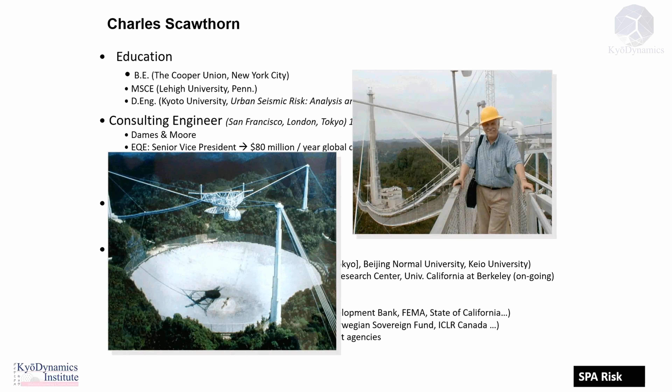I think you may be familiar with this. It was, no longer is, unfortunately, the Arecibo Radio Observatory in Puerto Rico. And about 20 years ago, I did a structural dynamic analysis of this for earthquake loading. It was very gratifying for me to do that, by the way, because my undergraduate professor had designed the structure back in the 1960s. It's a shame what happened to it. These are some of my books and publications, but that's the introduction.

My firm, SPA Risk, SPA stands for Scawthorn Porter Associates, and it's simply myself and Professor Keith Porter. He is a professor at the University of Colorado at Boulder, and we have one foot in academia and one foot in practice, and we both enjoy doing that. If you want to know more about the company, there's the URL for the website.

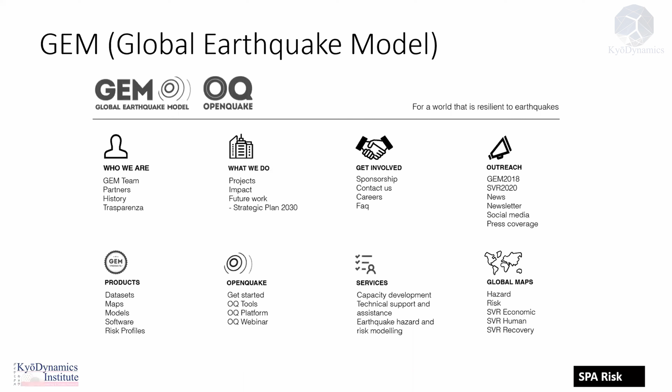I think most of you may be familiar with the global earthquake model, and I will not spend a long time discussing it or introducing it. If you don't know about it, you can quickly learn about it by going to their website, by Googling global earthquake model. GEM, the global earthquake model, was started about 15 years ago and has made tremendous progress in modeling both hazard and risk due to earthquake around the world.

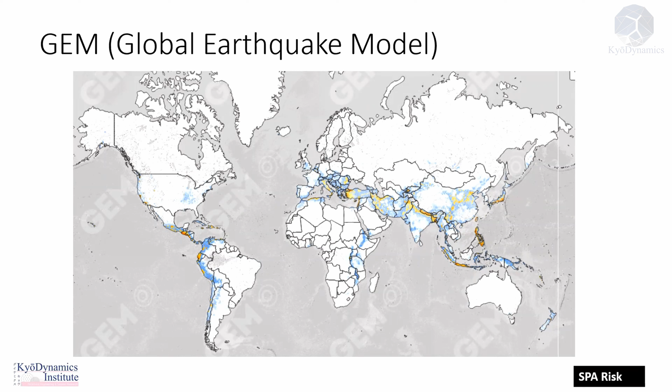This is their global map, and they are producing many of the foundational data, such as historic seismicity, instrumental seismicity, fault parameters, building inventories, building fragility functions, and so on. And the building inventories required the taxonomy, which is what I'll be speaking about today. This is a close-up of some of their mapping of the seismic hazard in Latin America.

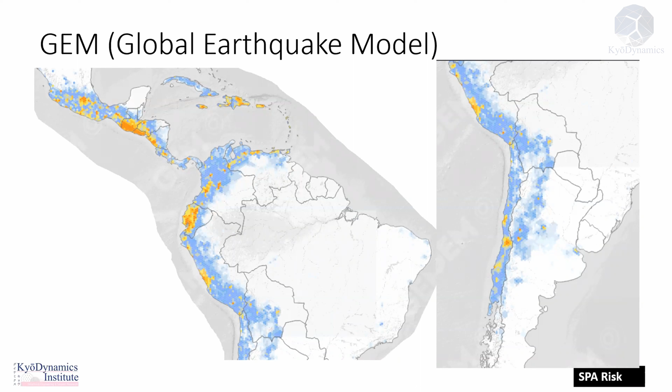So a taxonomy, what is it? The word was coined in 1813 by the Swiss botanist Candolle. It comes from the Greek, from taxis, meaning order, and nomos, meaning law. So it's a set of rules by which to create an order. It refers to the classification of things in an ordered system that reflects their relationships.

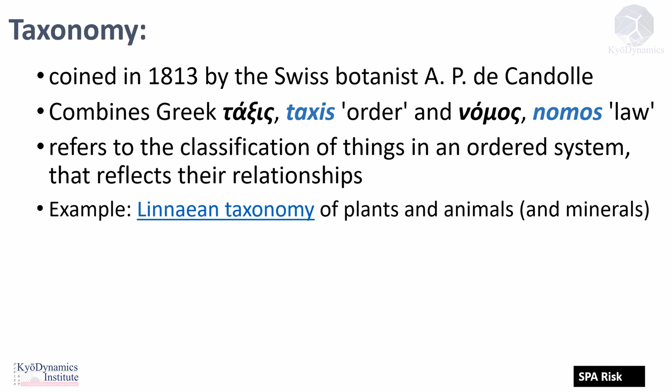The most famous and probably one of the first taxonomies was that developed by Linnaeus for plants and animals, which is still used today in the scientific world. Homo sapiens is an example of what we are called within that taxonomy. He also had a system for minerals, by the way, but that is not widely used. An example starts from the domain and goes down through the kingdom, the phylum, and so on to the genus Canis, where we have dogs and wolves.

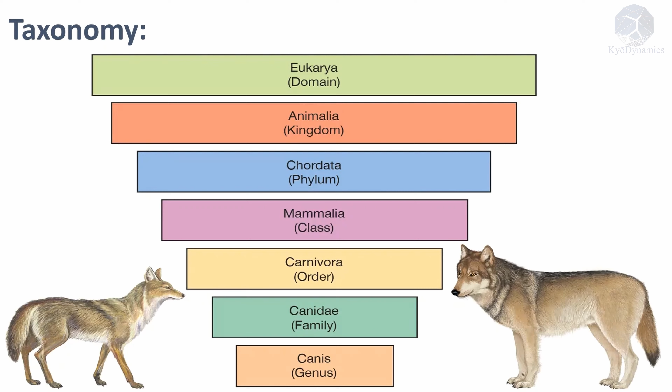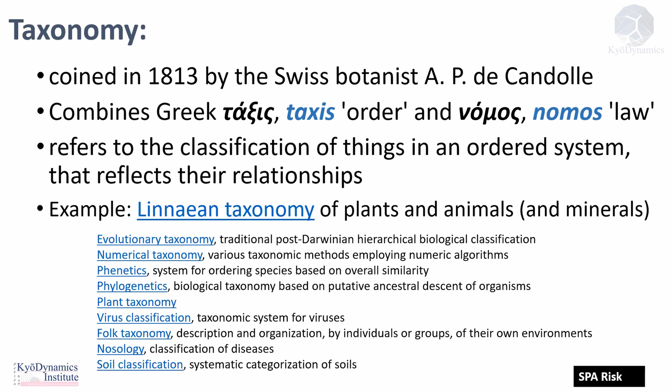Since that time of Linnaeus, there have been many other taxonomies that have been developed, and whatever field you work in, you're probably using a taxonomy or two right now. What I wish to speak about is a building taxonomy, which we define as describing the characteristics of an individual building or class of buildings with similar characteristics, a building typology.

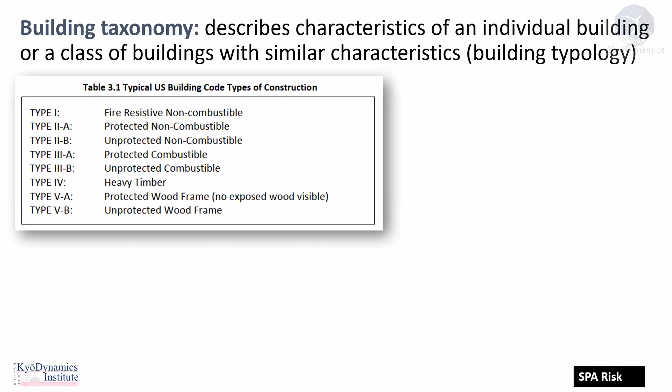There have been building taxonomies in the past. My references here will mostly be to North American practice, since that's what I'm familiar with. One of the most common is from the US, what used to be called the UBC, or Uniform Building Code, now called the International Building Code. And this is the taxonomy that they use for buildings in that code. Very simple and primarily driven by fire protection.

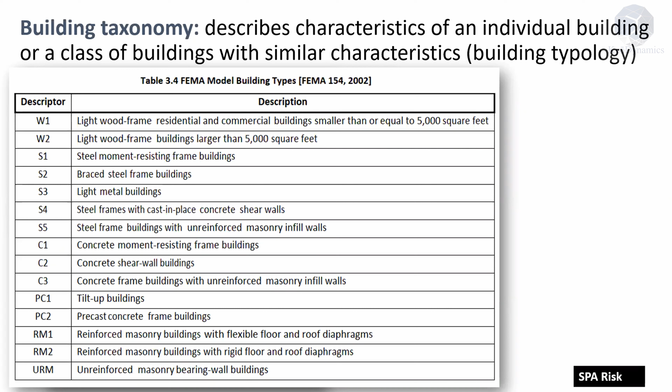For example, the last item in the list, URM, or unreinforced masonry bearing wall buildings. There are so many different kinds of unreinforced masonry bearing wall buildings that to all label them with a common label is just not accurate or useful. And so it's very unsatisfying. And that's what drove the development by GEM to develop this.

Rather, let me just say that in doing this, we reviewed all of this, and we came to the conclusion that a building taxonomy useful for risk analysis, particularly earthquake risk analysis, did not exist when we were doing this work. So the Global Earthquake Model funded this project, and the purpose was to collect information on buildings around the world to develop a basis for assessing their seismic vulnerability and associated risk.

The taxonomy, at the beginning, we set ourselves certain objectives. It should be international, cover all parts of the world, and be able to be applied in any part of the world. It should meet the needs of users who are able to collect information in sufficient detail, but also others who have access to only very limited information. So it should be at the same time deep where that's possible and, where it's not, relatively broad and shallow. On the other hand, we also set an objective that it should be manageable, and there should be a balance between the depth and the breadth of coverage.

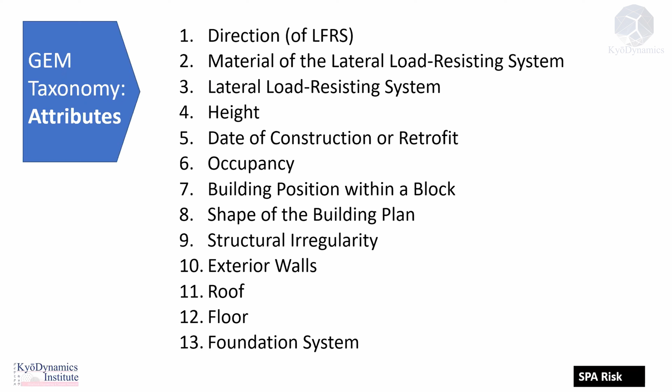A building built 100 years ago but retrofitted 10 years ago is not a 100-year-old building from an earthquake point of view. The occupancy, residential, commercial, and so on. The building position within the block, I'll talk more about that in a moment. The shape of the building plan, the structural irregularity, the exterior walls, the roof, the floor, the foundation system, and so on.

Now, I have a little video here that actually goes through this in a bit more detail. This was put together by the project, and let me just show it here. It goes on for 3 or 4 minutes. And let's see here. You may not be able to hear the audio. I'm sorry, I beg your pardon. This doesn't seem to be running here. Let's see. I'm sorry, the audio is... Alejandra, is the audio coming through? No. Okay. Well, we'll skip the video then.

The video was actually produced for lay people to very quickly lay out more or less what I just said. It was going to repeat some of what I just said and what I'll say here. These show those 13 attributes again, and for each one of them, you can see that they are the primary layer, but then beneath them, there are further attributes.

For example, if we look at the height, we define the height as the number of stories below ground, the height of the ground floor above grade, and the slope of the ground. And then, of course, the height of the roof above the ground also. The height of the ground floor above grade, by the way, may not be so relevant for earthquake concerns, but we were also looking ahead, and that would be of great interest for flood-related risk. The first version of this was focused on earthquake, but still we were trying to capture some of these things.

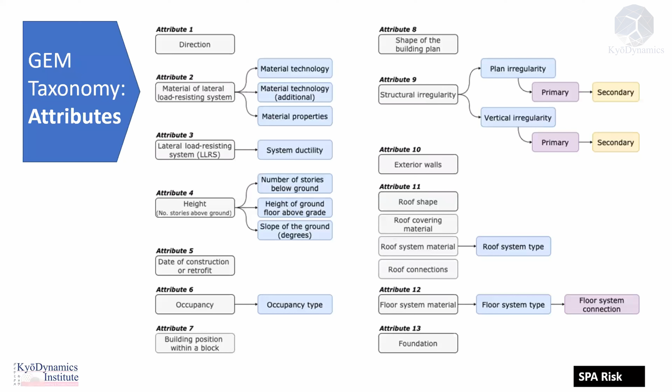So I hope you've had a chance to look at this diagram here. I'm not going to go through it in detail. And then if we just take a masonry building, as I mentioned before, masonry construction exists around the world in many different forms, depending upon the local materials and other things. So this shows you an example of the material technology just for masonry. You can see the different kinds of masonry materials we have here.

Masonry units that are unknown, or perhaps adobe block, or stone of an unknown technology, or rubble, meaning field stone or semi-dressed stone, or dressed stone, or fired clay units, but we don't know what type, or fired clay solid bricks, or fired clay hollow bricks, and so on and so forth. So all of these different kinds of masonry units can be defined within the taxonomy. We have codes for each of these.

Similarly, for the mortar, for example, was there no mortar? In various places there is masonry that's built without any mortar at all, so-called dry masonry or dry stone. Then there's mud mortar, there's lime mortar, there's cement mortar, and so on. And the different kinds of stone. Is it limestone, sandstone, granite, and so on, or unknown?

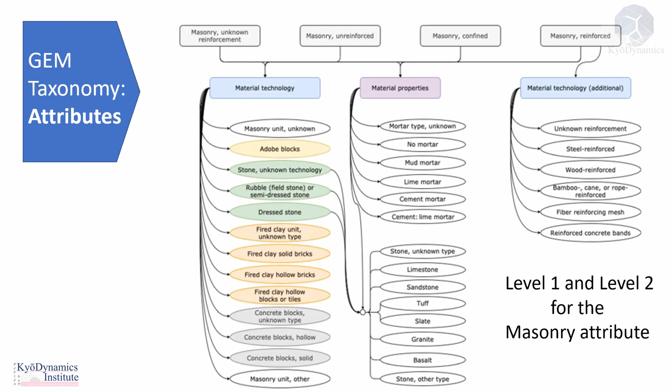All of these attributes were then compiled in a series of tables. Each table contains the values for one building attribute. This is, for example, the table for the lateral force resisting system. And you can see that at level 1, we have a lateral force resisting system, and L99 is a code meaning it's an unknown lateral force resisting system.

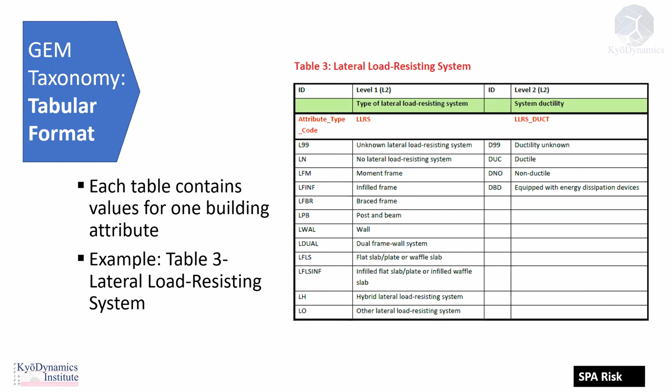LN means there's no lateral force resisting system. LFM means a moment frame. LFINF, an infill frame, then a braced frame, post and beam, and so on and so forth. And then over on the right at level 2, depending on whichever lateral force resisting system it is, there's a code for defining it as ductile, non-ductile, or equipped with energy dissipation devices. Level 1 and level 2.

And actually, by clicking on that, I'm hoping it will take us to that page. I don't see it happening. Again, sorry about that. My connections today are slow or don't exist.

But the idea, again, this is easy to find. You can just look up GEM glossary, and we define each of these terms. And similarly, putting all these terms together can become very daunting. So we developed a GEM building taxonomy tool, called TaxT, and it goes through and you enter whatever you know about it. And again, I'm going to try to go to that.

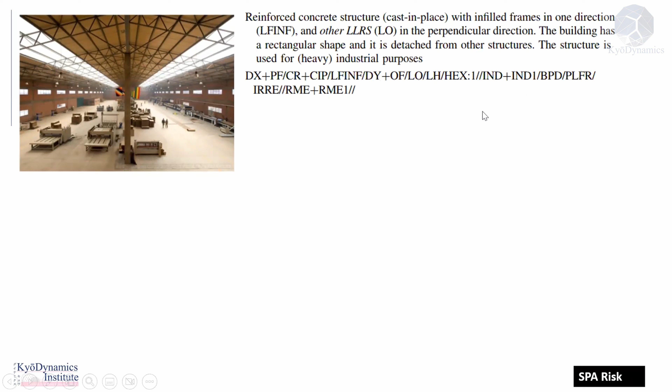So all of those aspects are covered in this code here. And I used to be able to read this code off very easily. I can't right now. Here's another one, a 14-story residential reinforced concrete building. So you would enter all the information you need, and the TaxT tool that I showed you would just generate this code. And this code is what goes into a database.

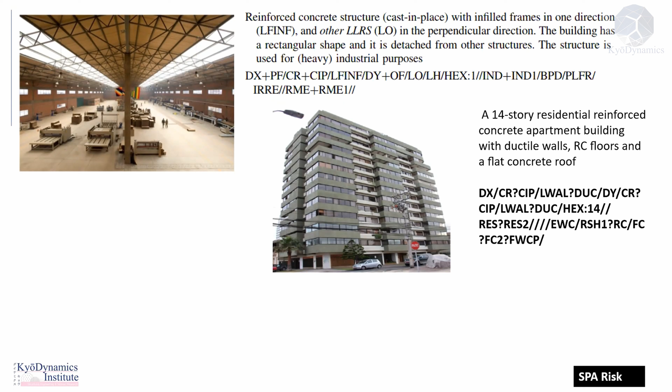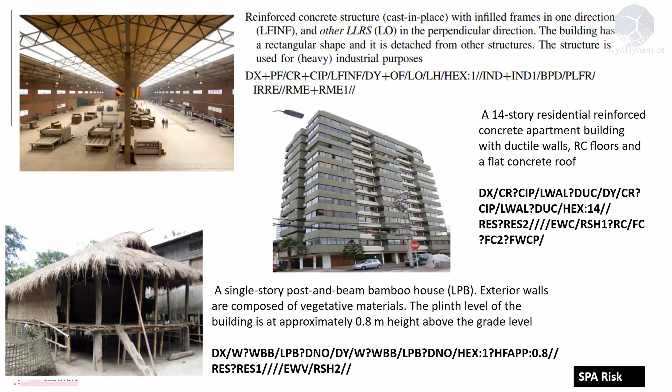Here's a third one. And this is a single-story post and beam bamboo house. As you can see, it's what's called vernacular, or relatively non-engineered construction from, I think in this case, Southeast Asia. So you can see the taxonomy was designed and is constructed so that we can go from heavy industrial buildings to more ordinary urban type buildings to rural buildings in any part of the world. And all of this is possible. The taxonomy can describe any of these kinds of buildings.

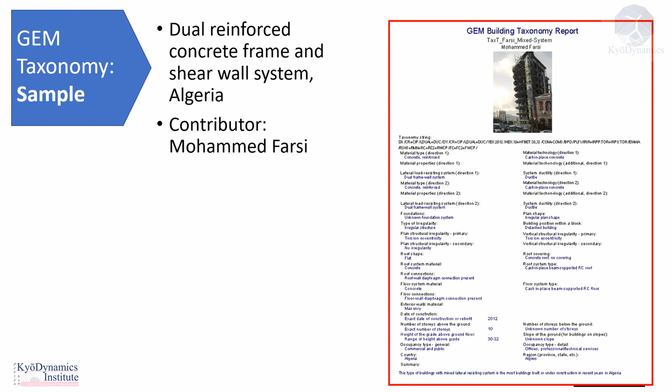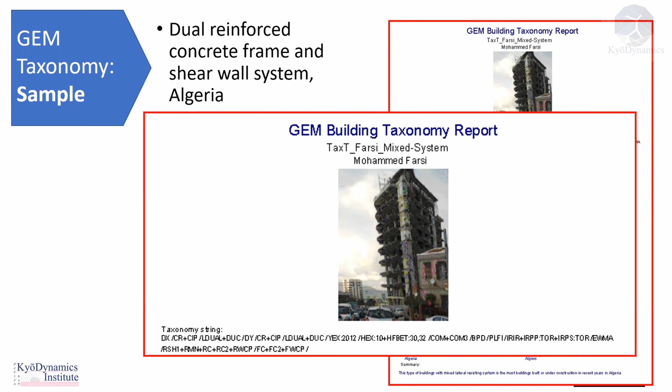Similarly, the same people give another example, again from Algeria, a high-rise building, and this was the taxonomic code for that high-rise building. So you can see that with a string of basically one line, you're able to describe a tremendous amount of information about a building that can then be used for regional earthquake damage loss estimation. And when I say regional, it can be at a very broad scale, say nationally, or it can be at a relatively small scale within one neighborhood and so on. Now, so that's a description of the, whoops, sorry.

I'm not sure what happened there either. Let me go back here, sorry.

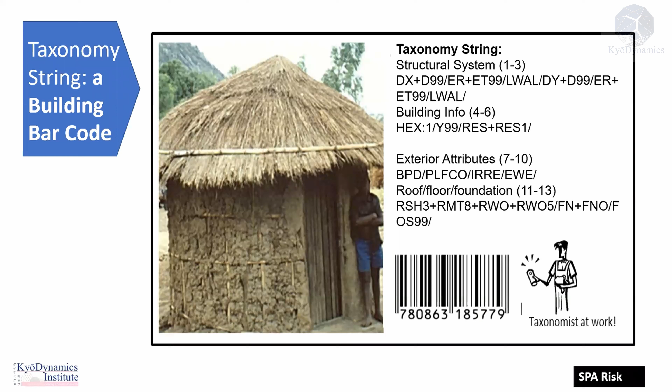And again, as I pointed out earlier with the bar code, with a handheld with the TaxT, which is on a smartphone, you can go basically to the building, inspect it, record as much information as you can, and then it will generate this code. Or if you're not able to do a field survey, you can do the same thing from whatever information you have on the desktop. So this tool, the inventory capture tool, captures the location.

This is on a smartphone. Using Google Maps, you're able to see where you are physically. So you can see the irregularities, the plan irregularities of the building, and so on. For each attribute that you want to enter, if you're not sure, the entire glossary is in the phone, so you can just click on it, and it will help you to make a decision as to whether it's an infilled frame or a shear wall, and so on and so forth.

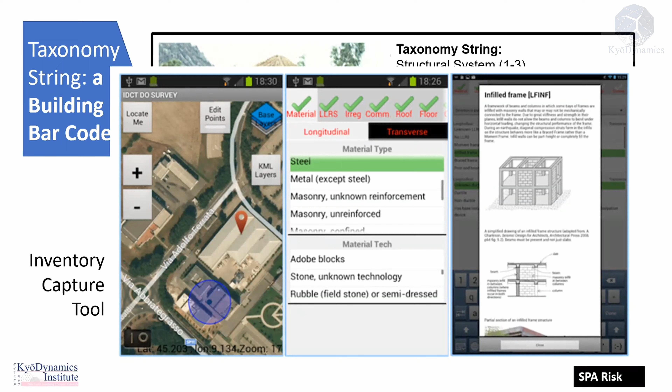So the applications are meant to be global. So this was released, and there's a report. It was finished about 2013. Since then, the Global Earthquake Model has gone on to extend it to multi-hazards. As I mentioned earlier, this was the vision from the beginning, that it wouldn't only be earthquake. They're adding attributes and further extending them to try and make this also applicable to high wind hazard and flood hazard and other hazards. Still, they're only scratching the surface there. They haven't gotten too far in that, but that's the vision and direction.

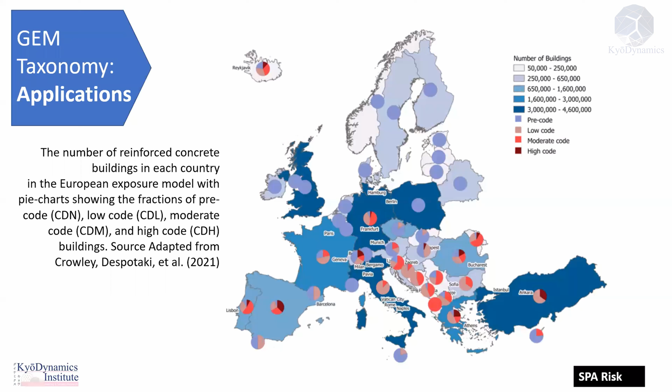I'm going to close here with just a few remarks. The work we did was considered an initial step. It was designed to be adaptable as more knowledge and techniques and research become available. And as you can see already, it has gone from the original version 2.0. Of course, there was a 1.0 also, but from the stable 2.0 to a third version, GED4ALL. But going forward, there's many things that could be done. For example, first of all, it needs to be more broadly disseminated and used so that it becomes a global standard.

So this talk is one effort in that direction. A lot of the publications that I've referred to and that I'll mention again at the end are also efforts in that regard. But as each of you are doing work in your region, you might look at this as a useful tool for describing the buildings. Not only will you be contributing to a global database, but you will also be gaining from all the work that's gone into this. And there are fragility functions that are now available for many of these standard buildings that are described by standardized taxonomy and so on. So we're trying to go to a global standard here.